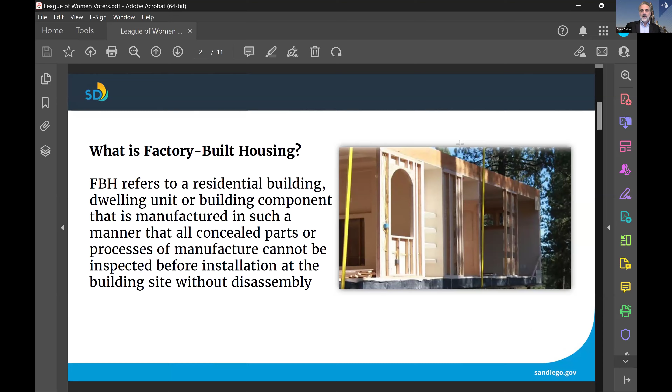What is not factory-built housing? A common misconception is that mobile or manufactured homes and commercial modular structures are factory-built housing. These are not considered factory-built housing. These have different requirements under state and federal law.

What role does the Development Services Department play in the factory-built housing environment?

We coordinate with the state on projects submitted at the local level to the City of San Diego to review the plans. There are certain things we can review and cannot review. Those things done at the plant in terms of factory built manufactured housing include certain components we would not review nor inspect once it's on site.

So our scope is limited in reviewing plans to site-specific requirements such as zoning. How many units can be built on this site? Are they utilizing affordable housing density bonus or complete communities or other housing programs at the local level? We can look at geology for soils conditions, fire, accessibility, and local amendments to the building code not adopted at the state level.

We also inspect the construction of those components that are not factory built, below grade parking, any retail or commercial that's part of that development. We've seen a lot of mixed use factory built housing that incorporates perhaps a coffee shop, a restaurant, or a community room with the factory built housing.

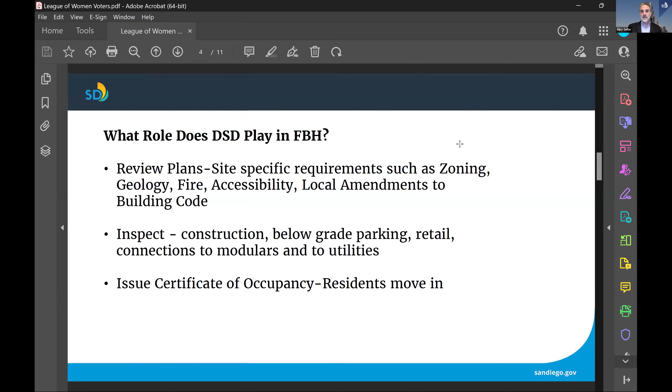We also inspect those connections to utilities on the site. And finally, our building inspectors issue the certificate of occupancy, and that's the point at which residents can actually move in and live in the factory-built housing.

What we found at the local level is that we've had successful implementation because we've worked with industry groups—some of the gentlemen are here with me today—in identifying what the rules are at the state level, what the rules are at the local level, and how we can better coordinate and streamline the review process.

The idea of factory-built housing is that it's cheaper to build and faster to deploy. If we can remove time out of the equation, these units can get to market faster. We had two successful rounds of a stakeholder group where we discussed ideas on our plan check comments.

When a structural reviewer identifies an issue, how does the architect respond to that? We look at what happens when it's under construction—what if there needs to be a change during construction, or what if there's damage to that unit brought to the site?

How do we coordinate with engineering and right of way—things done outside of the property line, connections to utilities, that sort of thing—to streamline and fast track the approval and construction of these.

And then we discussed the affordable housing programs that the City of San Diego has and how this factory-built housing model can fit into those, just like any other type of housing.

And then finally, we discussed inspections, because that is a key component in terms of our inspectors understanding what they should be looking at on the site to final these projects.

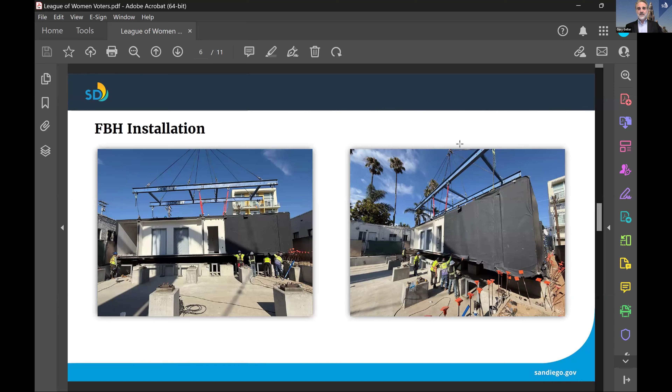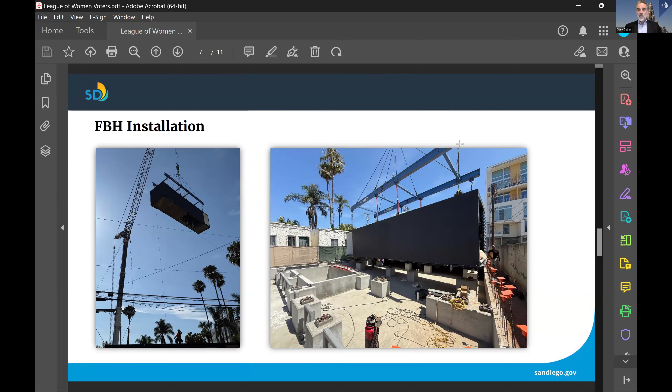These are some pictures of factory-built housing installations around the city of San Diego. As you can see, they're craned onto the site. What we noticed is these go fast, they move fast, so impacts to surrounding neighborhoods and communities are often less than typical construction because these can be done in a couple months or perhaps a weekend, depending on the size and number of units on a site.

Understanding that, we had to learn about traffic control permits, which are also required because if you're putting a crane on a site, you might have to have no parking signs or one-way traffic. There could be potentially impacts during the craning in of these structures onto the site.

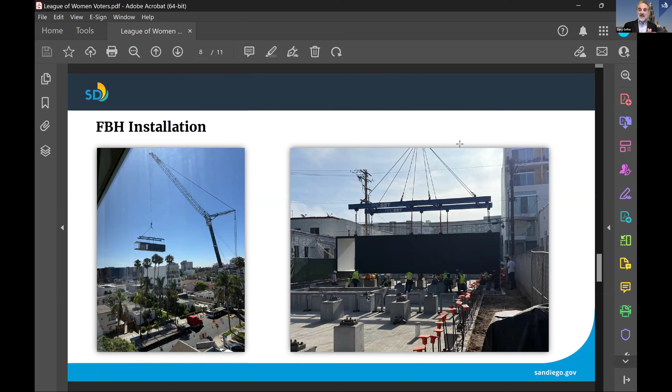So that's another issue we addressed with industry to see how we could better streamline that traffic control permit, because they have a timeline—bringing the crane on, moving the houses on—so we have to sync up our traffic control permits with their construction schedule.

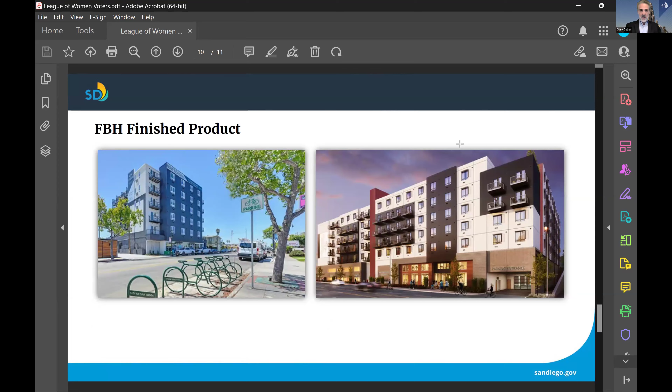Here's some other units that have been installed, and these are the finished products. The gentleman on the panel will also talk about some of the specific projects they've had in the city of San Diego. What's great about this is it's throughout the city of San Diego.

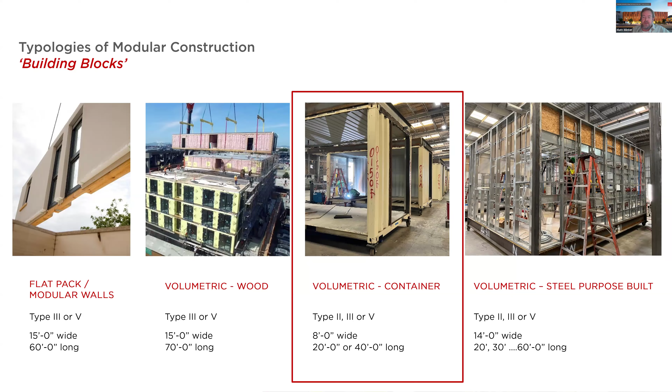Okay, so basically these are the four typologies I was talking about: flat pack modular, volumetric wood, volumetric container, and what we're now starting to call volumetric steel purpose built. One reason the industry is going towards volumetric steel purpose built or volumetric wood is that, as opposed to volumetric container, the containers—while there's this great idea that you're reusing recycled material that's otherwise sitting in the desert rusting away—you end up taking them apart and having to put them back together. So the industry is moving a bit further away from that.

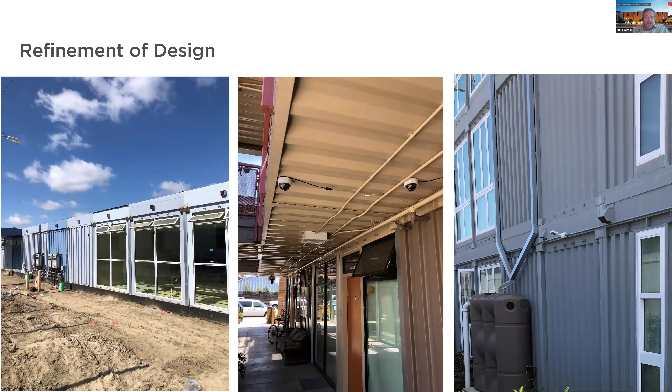When we first got into these projects, we looked at some existing projects and noted that they were very messy. People weren't very thoughtful about how they put them together, and they sort of slapped on a lot of extra conduit and lighting and all kinds of stuff. So we worked very hard, and you'll see later, to clean that up as best as possible. I think it's important, as this industry is maturing, that it's really thought through and carefully organized.

A couple interesting things about modular construction. One of the things you'll hear is why this is important is if you're looking at the schedule here, a lot of projects you can do the site work while the modular project is being constructed off-site. So you're taking this long green line of 24 months of construction, and you're cutting it in half and stacking it, making it concurrent.

So in this case, on the project we're going to share here in a minute, we were able to manufacture all that stuff while we were building the podium for the project.

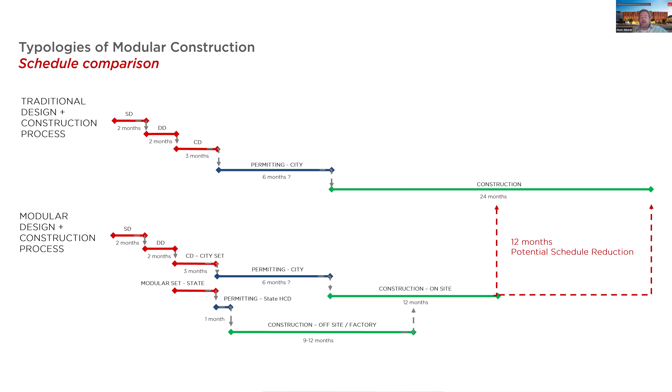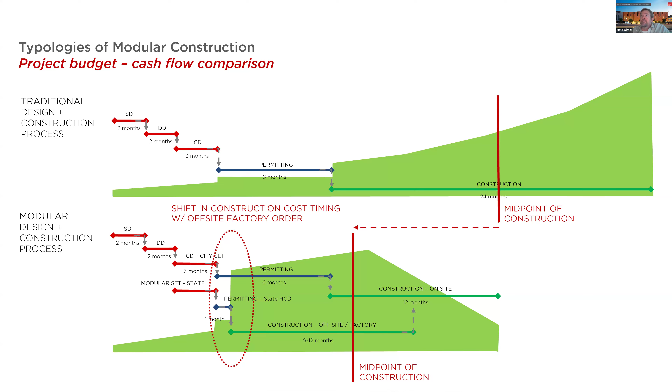Another important aspect for modular construction is a normal bank draw for any kind of construction project is typically 10%, 10%, 10%, 10% as you work your way through the project, buying more materials and getting more completed. But banks aren't used to the modular offsite factory cost, where you have to buy all the materials in one shot. So you're asking for more money earlier. It's a little bit of a different setup. However, some banks are becoming more comfortable with it, and some people are more vertically integrated and able to handle that way of working. But it is a different sort of financial outlay.

Other things that are important to understand while thinking about modular construction projects is location — relative to the factory you're at. Part of the conversation when looking at different modular manufacturers is transportation costs. Scale of the project is really important — being able to understand if the scale makes sense, understand the program. You can't have a lot of complexity in your projects; it's got to be relatively straightforward and simple to stack. That's why residential is a really good use for modular, and hotels is another one. Whether or not prevailing wage is part of your project is potentially a factor in whether it makes sense to go modular. And then understanding the local construction market and its costs.

So, the design process. This is the project we're sharing here, with Family Health Centers of San Diego. They're one of the largest nonprofit healthcare providers in the country, and the largest in San Diego County. They have about 50 health clinics in San Diego County.

However, they've recently become very aware of how important housing is to health and how the two are intimately connected. So they had a site where they had an opportunity, on El Cajon Boulevard, where they could put housing on one of their clinic sites. They decided to go all in on this project I'm about to share, which was housing on top of their clinic, on top of parking, and also go modular. So they kind of jumped off a double diamond slope on their first housing project, but I think it was really successful.

What was important here, to talk a little about the design, is the community plan actually calls for a bit of a street wall on El Cajon Boulevard, but this particular site doesn't have a height limit — they just updated their community plan for higher density in this region. But we were still trying to be sensitive to the multifamily and single family on the north, so we broke up the building on the north side as best we could to really break up that massing. So when you're looking at it from the backside, it's smaller chunks.

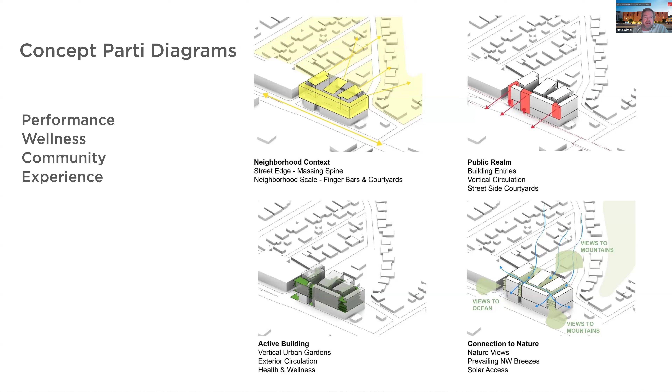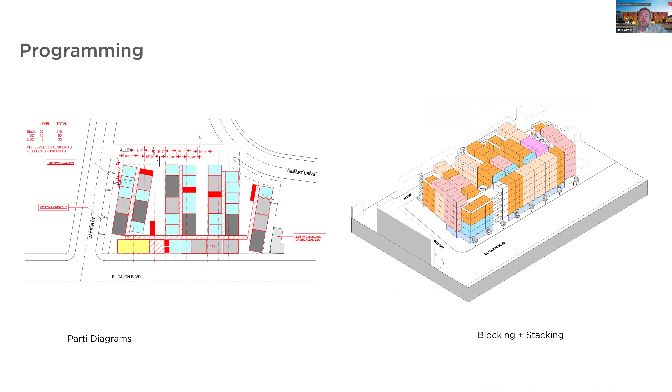Even while the community plan asked for more of a solid street wall on one side, we also broke it up to increase airflow and create more public realm spaces and better lighting throughout the project. From a programming standpoint, we had all these building blocks, basically. One thing about modular is it does give you some very strong constraints to organize your building — in fact, it was really helpful in this process, and I'll get to why in a little bit. But first, we had to understand the massing, and then we had to flow in the actual container pieces.

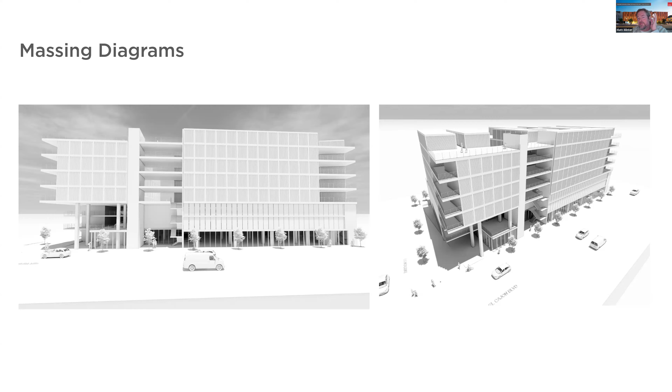As you can see, those are containers stacking on top of a ground level clinic and two levels of parking above it. Even with the street wall requirements, we tried to break up the facade as best we could so we can allow more airflow to go into the building.

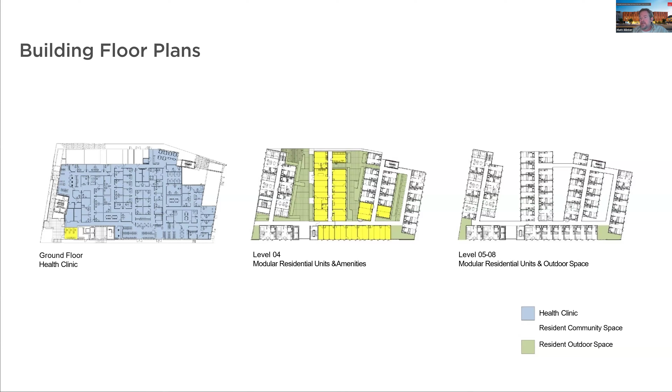Here's the floor plans to give you a better idea. On the ground floor, there's a big 20,000 square foot health clinic. On the fourth floor is where all the green space is and some of the public spaces. You can kind of see it's sort of an E shape facing north.

In this case, we were grouping them around a shared system specifically because we're trying to get to net zero and we're using a very highly efficient energy system with grouped up mechanical systems. So it's a little bit different, and we had to really track how that chased through the hallways.

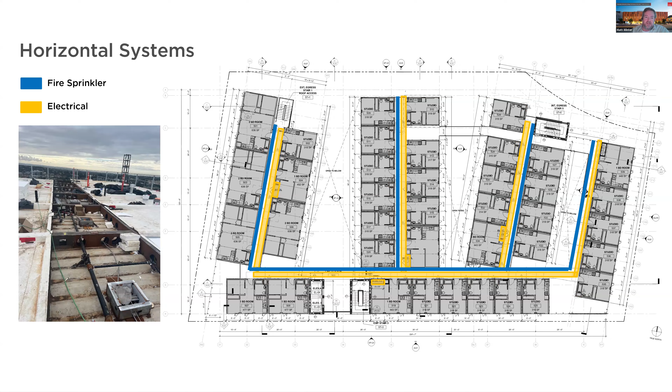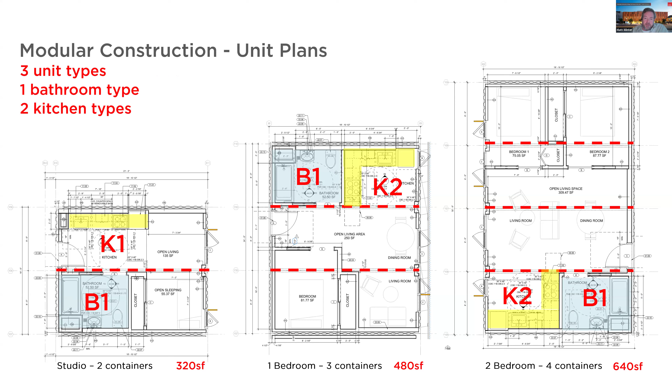Here are the modular construction unit plans. You can see, very, very simple. For the entire project of 172 units, we had one bathroom type and only two kitchen types between our studio, one bedroom, and two bedroom units. You can clearly see it's 2 containers, 3 containers, 4 containers. Real small units here, you can see them seam up together.

Now, it was really important for us to think about high performance design. It was one of the requests and programmatic requirements from the ownership, so we needed to make sure all the water, electrical, and mechanical systems were integrated in the building. Right now we're tracking at 86.6% energy reduction from baseline, so we're really close to net zero on this one, which is really hard to do on a tall building. We're really proud of that.

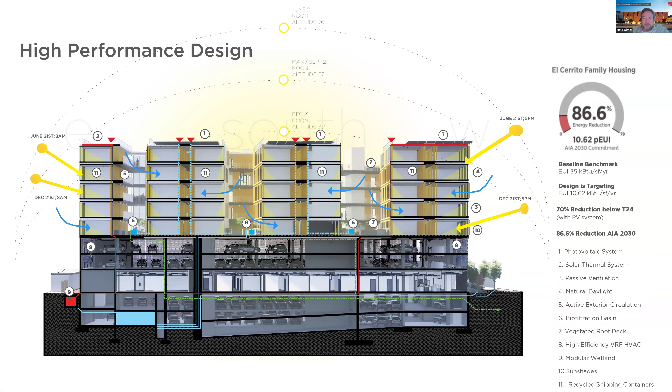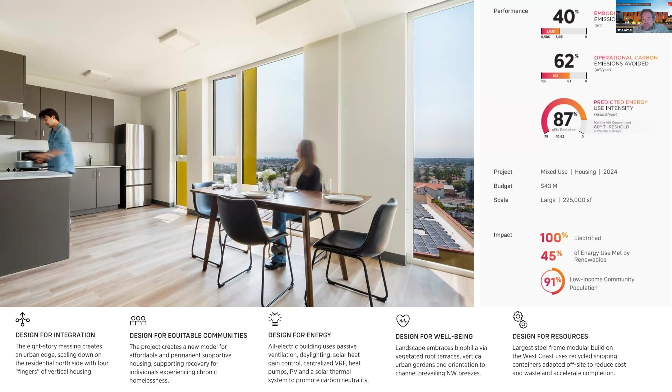When you have these smaller units, it's really important to do the best you can with light and windows. This is the same amount of glass as a typical residential multifamily project, percentage-wise, but we made it a little skinnier and taller and grouped it up more in certain areas. As you can see, it lets the light flow across the ceiling and floor a lot better as opposed to a punch window in a room. So that was really important.

Modular permitting process, just a couple more slides with this, and then I'll zip through the pictures. As Gary was alluding to earlier, there's a state review of the modular stuff, and then a local review of all the stuff that's local. In this case we had a huge podium, vertical stairs, things like that. There are modular projects that have modular stairs and modular elevators, but in this case it wasn't part of our program.

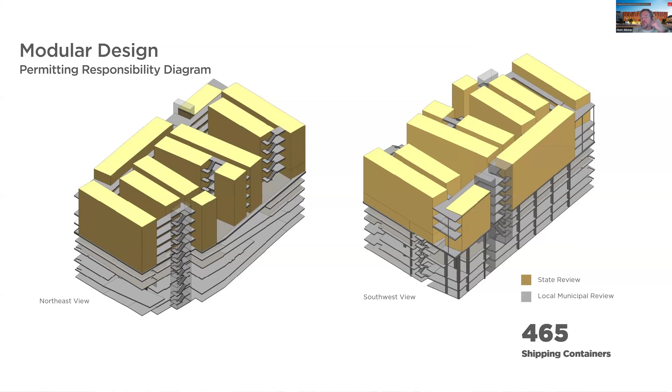This is 465 shipping containers. As you can see, here's this little elevation. The city is still the grantor of occupancy, and they're still the inspector of all things local.

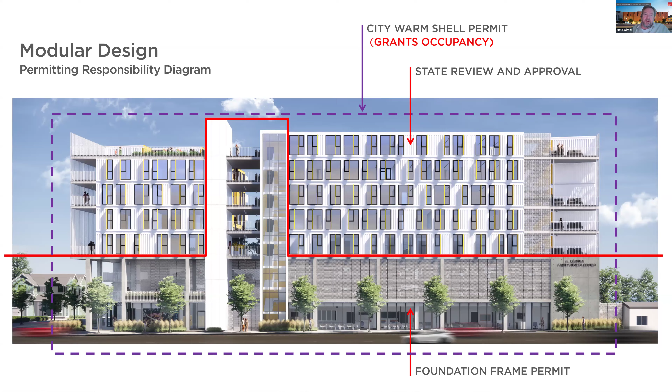So we had to have our local guys. In our plans, we had to very clearly explain who did what. So the state did review all the multifamily project, and they have inspectors at the factory.

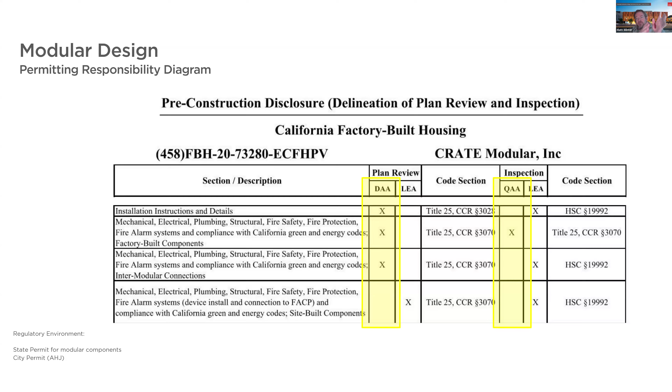That's reviewed and approved by the state agency, yet inspected by the local jurisdiction. And on the last line there, you can kind of see if anything that's sort of site built is local review, local jurisdiction. So it's really important that we had a lot of these conversations before we got started with our plans, and we have this matrix in our plans.

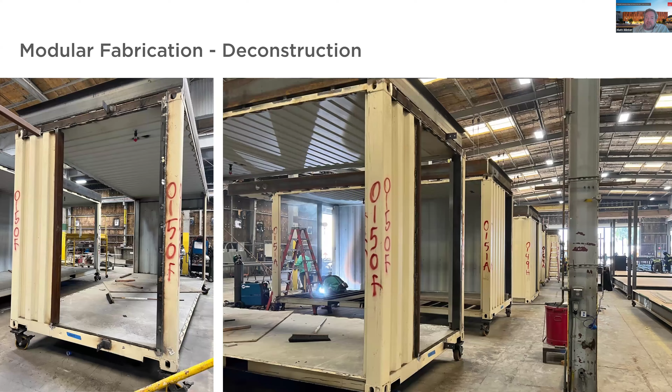Fabrication, I'm going to zip through these really quickly, but so you can kind of see we deconstructed the project, the containers, you're putting it back in there. One really nice thing is you can do mock-ups with this thing.

We did an accessibility mock-up to make sure before we built 150 bathrooms that they were fully accessible and reviewed by our accessible CASp reviewer, and we made adjustments with countertops and things like that to make sure that went right.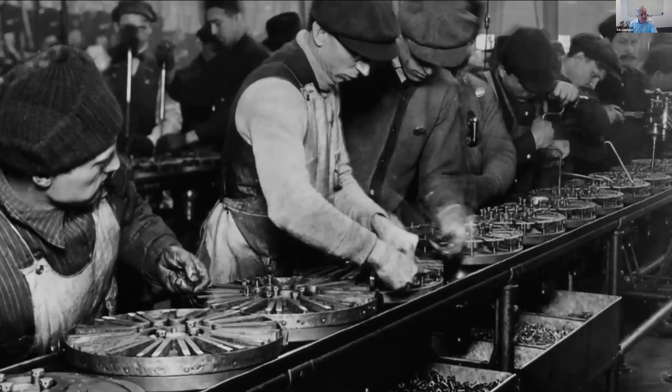Progress never arrives all at once. It compounds. Civilization's journey started with fire. It lit up the night skies and kept us warm. The wheel moved goods and people. Ships transported us around the world. Steam power gave few the strength to do what took many. Electricity powered our cities and our imaginations. The year is 1913. They called it the car for every man. Henry Ford himself called it a car for the great multitude. It was functional and simple, like your sewing machine or your cast iron stove. You could learn to drive it in less than a day. And you could get any color you wanted, so long as it was black. When Ford first conceived the Model T, it took 13 hours to assemble. Within 5 years, he was turning out a vehicle every 90 seconds. Of course, the real invention wasn't the car, it was the assembly line that built it. Pretty soon, other businesses had borrowed the same techniques. Seamstresses became button sewers. Furniture makers became knob turners. It was the beginning and the end of imagination, all at the same time. Housing construction in 1915 applied the modern advancements of its time. The world kept progressing, except for one industry. The construction process is stuck in 1915. It is time to catch up.

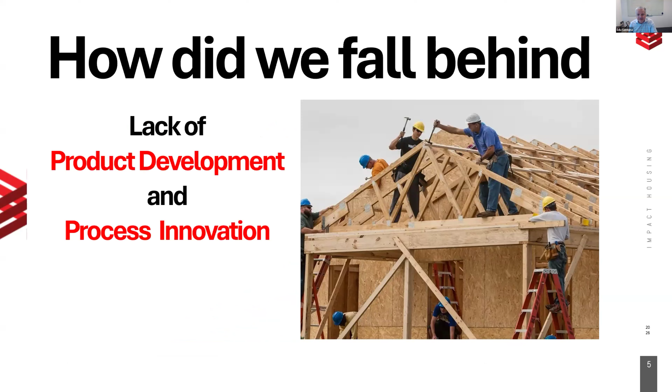Going back again to the reference in the video, another part of that is the cost Ford had to build a new car in 1913 was about $850, and then they were able to see costs go down over time as their processes improved. They approached the building of cars as a manufacturer would, not as something that perhaps was done before that time.

We've already seen a reduction in our costs and are projecting even further cost reduction as we're able to buy higher volumes of materials, so per unit costs for the materials come down. We're more efficient in how we're assembling the units using advanced manufacturing methods. There are a lot of different things we're doing to bring that to bear, and that's leading to lower costs, which isn't something typically seen in our industry. Typically, people assume costs are going to go up over time.

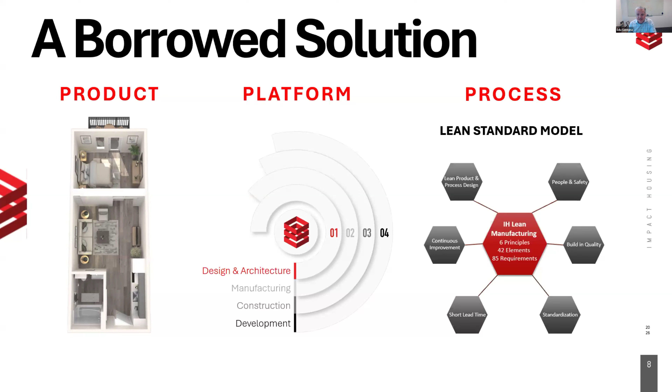We're rethinking our platform. For example, we're fully vertically integrated, where we're doing the design and architecture, manufacturing, and construction all in-house. And then we're not only the design builder, but we're also a developer, so we can handle all of the development aspects of a project and do soup to nuts, or offer the design build services to third-party developers and deliver their project for them. We're also establishing best practices in manufacturing, which I'll talk about in a second.

So again, on the platform, this is atypical in our industry. There is such a thing as design build, where you have contractors with in-house architects, but then to add the manufacturing piece as well.

Again, it's all of these disciplines that are in-house. The reason that matters is because they work together on a daily basis to solve problems that then get applied as a standard process and product for future projects. When you have all of the key disciplines in-house, the level of collaboration and problem solving isn't really about pointing fingers ever. It's really about discovering issues, solving them, and applying that solution to future projects.

And then, as the development entity, we could take responsibility for creating our own demand, for bringing in capital to finance the projects, really having a single source for all of it, and of course then offering the design build capabilities to third parties to build for them.

One of the most advanced ideas regarding manufacturing is this idea of lean manufacturing. It's actually based on the Toyota production system that really had Toyota become the preeminent car manufacturer and surpass all of its competitors. Everyone's sentiment when they first came out with this was, wow, Toyota builds the highest quality vehicles. Since then, almost every car manufacturer has emulated their process.

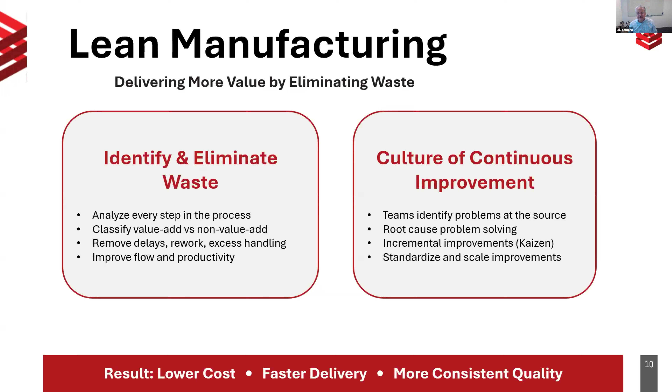What we're doing is taking the same ideas of lean manufacturing and bringing those not only into our manufacturing operation, but also into our construction and our architecture, and even our administrative and business administration, because at a very high level there are two core principles: identifying and eliminating waste, and a culture of continuous improvement. Waste leads to higher cost and longer timelines. When you eliminate waste over time, you're able to deliver at a lower cost and faster. Continuous improvement means finding challenges, finding issues, finding problems, solving them, and having those incremental improvements applied over time.

The other big idea we pursue is that we don't find a site and build and design units for them. We have units that are our products, with specific work instructions for every bit of scope that comes with manufacturing the units you see here, and that's what we offer. When a developer comes to us and says they want us to build a project for them, we show them our product line and say, which of our units would you like us to use?

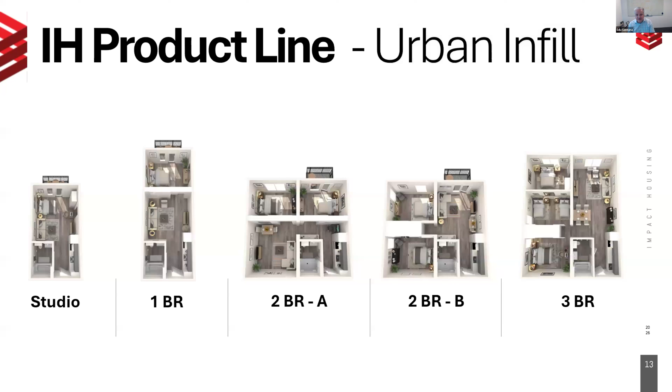But we have a product line, and the same units are used in every project, improved incrementally over time, focusing on really efficient use of space. Because we only have a select number of products, we spend a lot of time and energy properly designing those units, ensuring they're the best we can produce given the constraints inherent to the modular manufacturing approach, where you need to deliver units on the backs of trucks. So the dimensions are set at 14 feet wide, so we can transport them on our highways.

Also looking at some of the interiors, creative use of space, additional storage, etc. But really looking for high touch, high quality finishes, without breaking the budget.

So in closing, for us, modular is a means to an end. It allows us to deliver housing at the speed of need, and in San Diego there is a tremendous need for more affordable housing. The city is continuing to grow, attract more employers, and we need housing for those new employees. Also for the current residents of San Diego, a lot of whom are relegated to older housing that doesn't have the modern features and finishes we're able to provide.

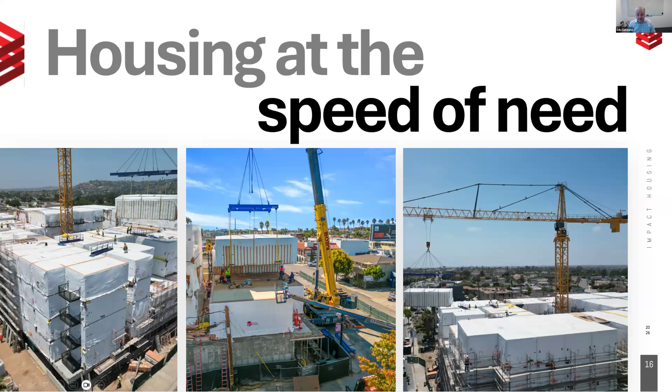So I'll leave it there. I have a lot more visuals if anyone's interested, but I'm open to any questions.

Wow, that was terrific, Edu. I think I was at the Academy Awards there for a bit. So thank you so much. We are now going to switch to questions, and I can see that you have generated some. I want to introduce my co-question moderator, Miles Pomeroy, who is also co-chair of the League's Housing and Homelessness Interest Group. Miles, are you seeing the questions? I am, yes. Okay, why don't you go for the first one, and we'll take it from there. We should run till about 6:30, we can go a little longer, but go ahead, Miles.

Okay, first question: what is the price differential from reusing containers versus new steel construction? And do you consider the reuse, recycle element?

That sounds like it's headed in my direction. Yes - the shipping containers used in housing are very specific. They can only cross the pond one time, they can't have any wet goods, only dry goods, and they can't have lead in the paint or formaldehyde in the plywood. So they're not inexpensive containers. It turns out, and this is one of the reasons the industry is moving the other direction, that it's less expensive to just build them using volumetric metal fabrication instead of containers. We are using some more recycled materials, but I can't give exact numbers because it's wrapped into larger projects. I will say it's cheaper to not do containers, which is why the industry is moving away from it. That's our understanding.

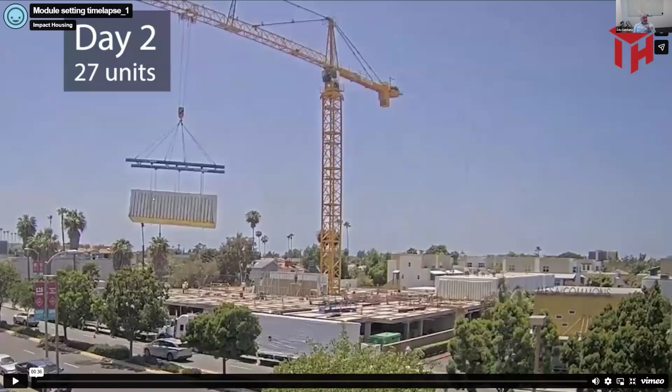Well, I mean, I will say this - we get asked this question a lot, and when you look at what we're building, I'll share a video again here to illustrate it. What we're building are fully volumetric modules, so you have material on every side. Between units, you have double the amount of wood material that adds to the structural strength of the project, and that's a big deal - it adds to the durability of the building. Also, a lot of the structural requirements of the units are based on them being able to be shipped on the road, which is even more onerous than earthquake standards. So from our perspective, the durability is even greater than stick-built housing.

And I can second that - there's not a big difference. In some sense, these projects still have the same amount of electrical wire, the same amount of copper pipe, the same amount of drywall. It's not wildly different from a stick-built building. It's all about process though - it's about how to compact time. A lot of modular manufacturers will say our product is even better because we're building it in a controlled environment, and I think that's true in a lot of cases.

Okay, the next question: is it your sense that factory-built housing is becoming increasingly used across the country? This is getting your wider scope here. And it's noteworthy, the questioner asked that modular housing or factory-built housing is included in the proposed housing bill before Congress right now. Do you have any sense of what contributed to it being included in this bill?